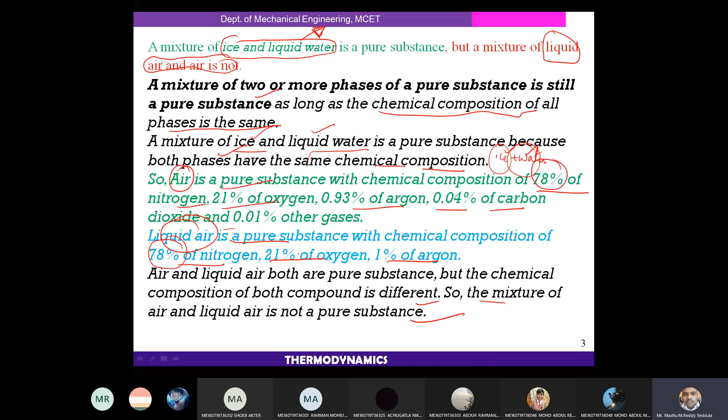The moisture content - you can see the difference between air and liquid air. In air, nitrogen is 78%. In liquid air it is also 78%. And here it is 21% oxygen, 21%. In liquid air, there is no carbon dioxide and no other gases. Carbon dioxide is not there in liquid air. In the absence of carbon dioxide, the air can be called liquid air.

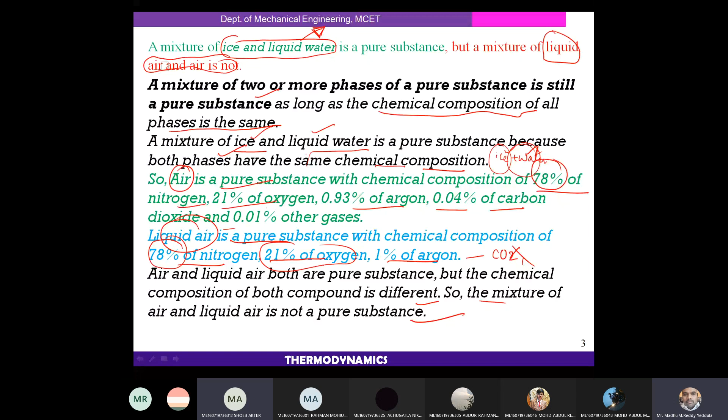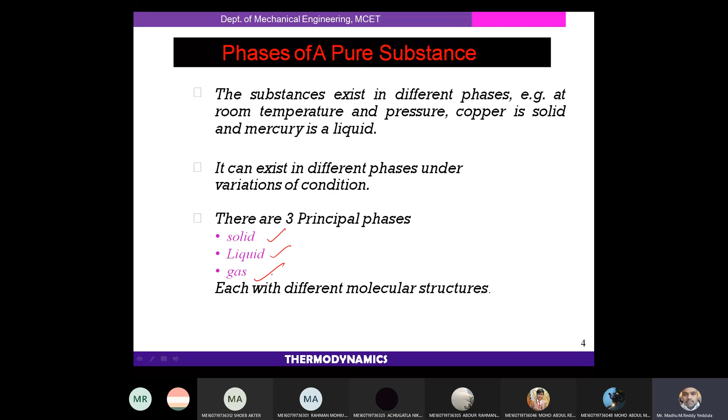Yes sir, okay, right. Now phases are already discussed. So basically any substance can exist in three different phases: solid phase, liquid phase, and gaseous phase. In solids, the molecules are tightly packed. The intermolecular force of attraction is very high, and that is the reason they are very rigid. They have definite shape, size, and volume.

Whereas coming to liquids, the intermolecular force of attraction is a little less compared to solids. That's why they have volume, but they don't have definite shape - whichever container we pour them in, that shape they will occupy. Coming to gases, the intermolecular force of attraction is very low, and they are free to move. So if you keep solid, liquid, and gas on a table, the solid remains in position and the liquid starts flowing. Naturally liquid will move from high altitude to low altitude.

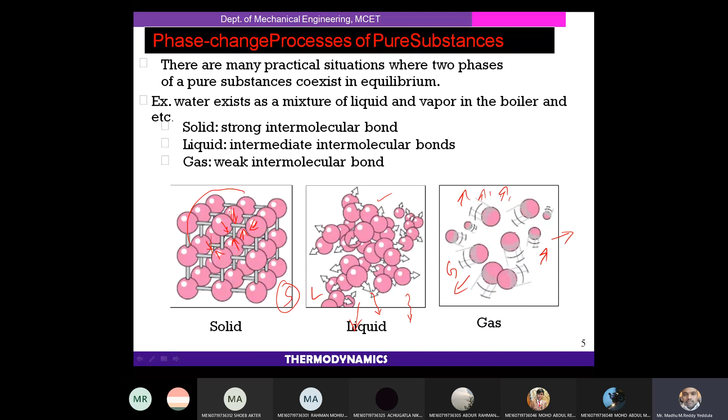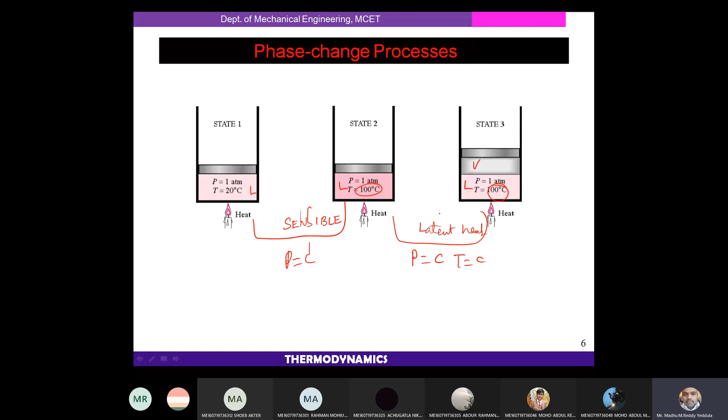So I can call it sensible heating. In sensible heating, phase remains the same but temperature is different. Whereas here, part of the liquid is converted into vapor, and the temperature remains constant. Temperature is also constant, but phase change occurs - this is called latent heat. Sensible heat means different temperature but same phase, whereas latent heat means same temperature but different phases. I already explained the difference between latent heat and sensible heat in the first unit itself.

This is a representation of the constant pressure line in the TS diagram. I already explained that the left side line is called the saturated liquid line and the right side line is called the saturated vapor line. This liquid line and vapor line intersect at a point, and this point is called the critical point. Above this point it will behave as a perfect gas, having the properties of a perfect gas.

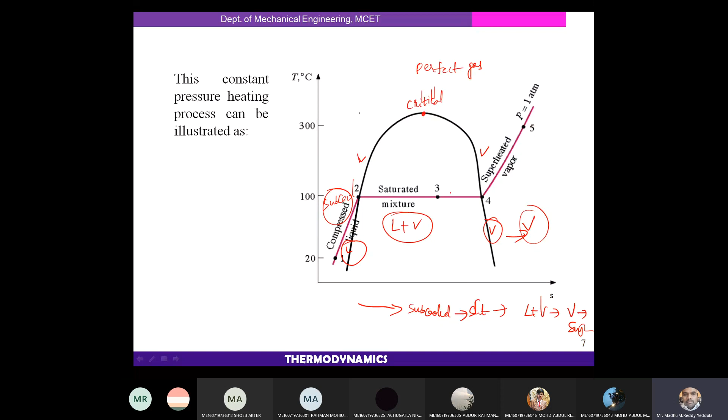If you move to the left of this, this is the subcooled zone, and this is the combination of liquid plus vapor - this line is the liquid line and this line is the vapor line. The right side of this is the superheated vapor zone. If you heat further at constant pressure, I can call it superheated vapor, saturated vapor, liquid plus vapor, saturated liquid, subcooled liquid. So moving left to right, first subcooled liquid will be there, then saturated liquid, then liquid plus vapor, then saturated vapor, then superheated vapor. This is how the phases change if you increase temperature at constant pressure.

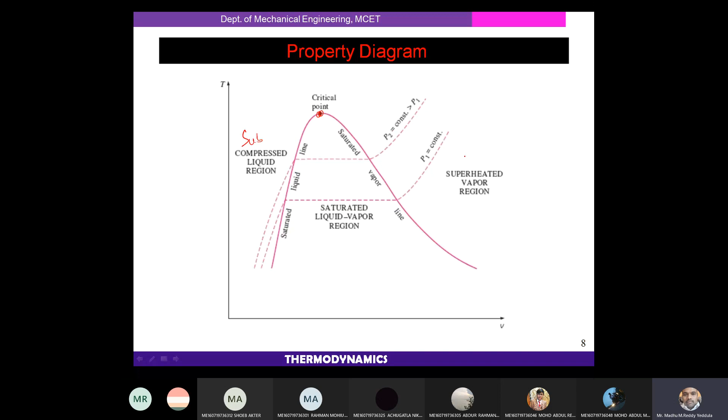Saturation is defined as the condition in which a mixture of vapor and liquid can exist together in equilibrium at a given temperature and pressure. The corresponding temperature is called saturation temperature and the corresponding pressure is called saturation pressure. Both liquid and vapor can exist together in equilibrium - that is called saturation. So the pressure corresponding to that, at which liquid and vapor phases are in equilibrium at the temperature, is called saturation pressure. Similarly, we can define saturation temperature also.

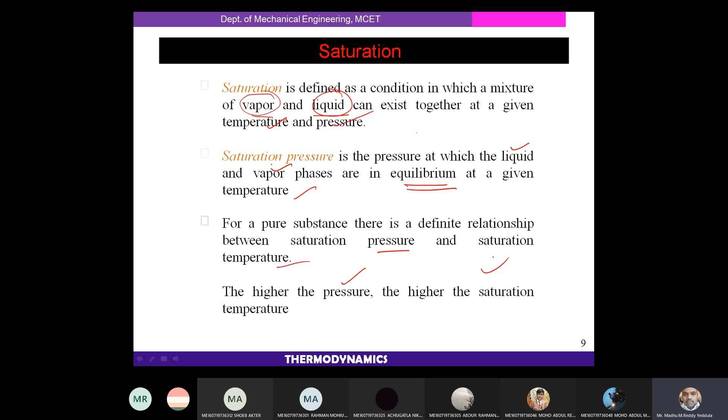For a pure substance, there is a definite relationship between saturation pressure and temperature. As I already told, if you decrease the pressure, the boiling temperature will decrease; if you increase the pressure, the boiling temperature will increase. Meaning the higher the pressure, the higher the saturation temperature. At atmospheric pressure, the saturation temperature of water is 100 degrees centigrade. If you decrease the pressure below atmospheric, the saturation temperature will also decrease proportionately.

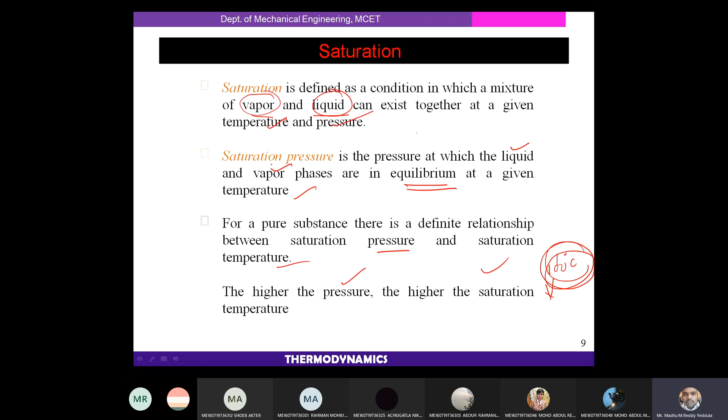Conversion is very, very important - if you have any doubt, please ask me. 1 bar is equivalent to 100 kilopascal, and this is also equivalent to 0.1 megapascal.

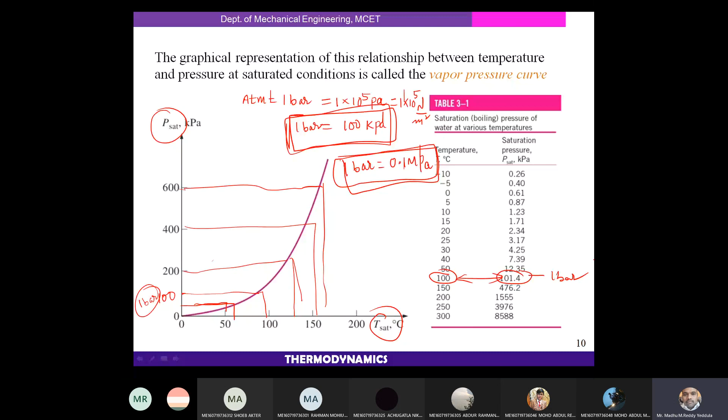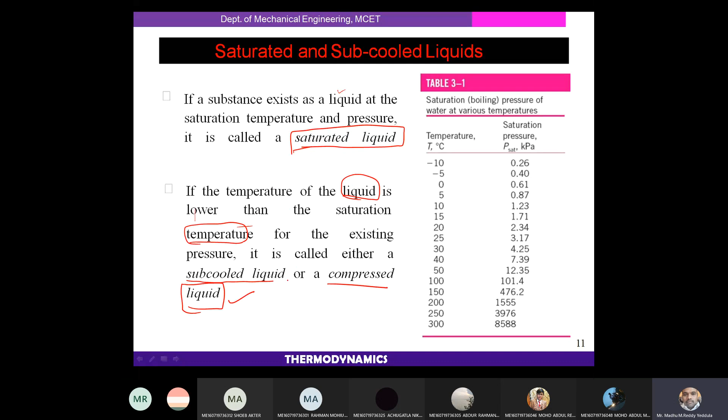Okay, if the temperature of the liquid is less than the saturation temperature, right? It will move towards the left side. If we move towards the left side, then I can call it a subcooled liquid or compressed liquid. If the temperature is less than the saturation temperature, then that fluid is called subcooled liquid or compressed liquid.

And if a substance exists entirely as vapor... if the temperature of the liquid is less than the saturation temperature, we call it a subcooled liquid or compressed liquid. And if the substance exists only in the gaseous or vapor form, I can call that a saturated vapor. Saturated vapor means it exists only in the vapor form. And if the vapor is at a temperature greater than the saturation temperature, meaning it will move towards the right of the saturated vapor line, we can call it a superheated vapor.

See, if you understand this, it is easy to remember. If you remember this curve - liquid line, if you move to the left side, if the temperature is less, it is subcooled. Vapor line, if the temperature is more, it is superheated vapor. That's it. Superheated vapor: if the vapor is at a temperature greater than the saturation temperature. So this is the saturation temperature corresponding to one particular pressure.

Okay, this is a constant pressure line. This is the saturation temperature corresponding to one particular pressure. And if you move towards the right, meaning if the temperature is greater than that, then we can call that vapor a superheated vapor. The pressure and temperature are independent properties, since the temperature may be increased while the pressure remains constant, right?

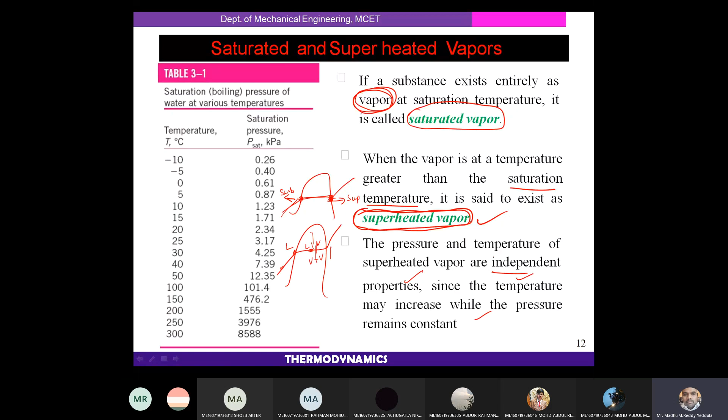So here's one more good example. This is the pressure line, right? So here pressure is constant, but if you add heat, first it comes to the liquid state, then liquid plus vapor, then vapor, and then superheated vapor, right? But throughout the process, pressure remains constant. That's why the pressure and temperature of superheated vapor are independent.

Okay, right, I already explained latent heat. Latent heat means there will be a change of phase, but temperature remains constant. The amount of energy absorbed, required, or released during the phase change of the process - let us say when the energy is released, when the energy is absorbed, right?

Now, if you want to convert water to steam, you need to supply energy, right? If you want to convert water to steam, you need to apply heat - that is nothing but adding energy. If you want to convert steam to water, meaning cooling of the steam - during the cooling of steam, I can call it condensation of steam. During that process, heat is lost by the steam, I can say heat is released by the steam. Okay, so that is latent heat.

Latent heat means the amount of energy that may be absorbed or released during the change of its phase. And latent heat of fusion - latent heat of fusion means the amount of energy absorbed during melting, the amount of energy required to melt the ice, to convert ice at 0 degrees centigrade to water at 0 degrees centigrade, because in latent heat temperature remains the same, only phase changes. Ice is solid phase, whereas water is liquid phase, right? So in order to convert ice at 0 degrees centigrade to water at 0 degrees centigrade, the amount of heat energy required is called latent heat of fusion. You got the point?

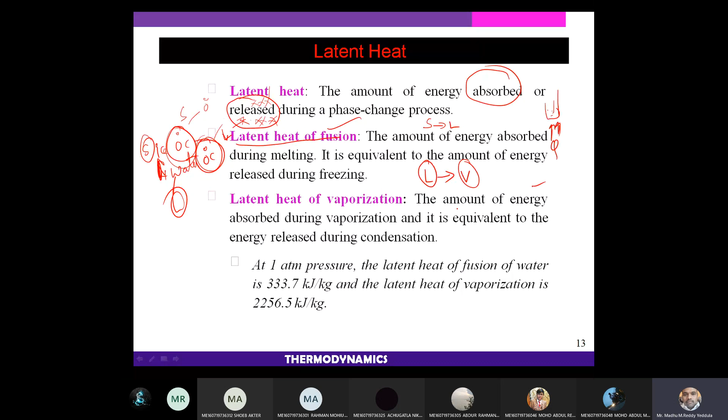The amount of energy required to convert liquid into vapor, or the amount of energy absorbed during vaporization, is also equivalent to the energy released during condensation. If you cool the steam, it loses its energy, so that energy is released. The same amount of heat absorbed during vaporization will be released during condensation. Condensation is the cooling process, whereas vaporization is the heating process. If you heat the liquid, it converts into vapor—that's vaporization. If you cool the vapor, it converts into liquid—that's condensation.

You might have studied this in school, just a revision. At 1 atmospheric pressure, the latent heat of fusion of water is 333.7 kilojoules per kg. This means if you take ice at 1 atmospheric pressure, the amount of heat required to convert ice into water equals 333.7 kilojoules per kg. If the ice mass is 1 kg, it requires 333.7 kilojoules of heat to convert into water. The latent heat of vaporization is the heat needed to convert this water into vapor—again you have to add heat. 2256 kilojoules of energy is required to convert 1 kg of water into steam; that is called vaporization. So 333.7 converts ice into water, and 2256 converts water into vapor.

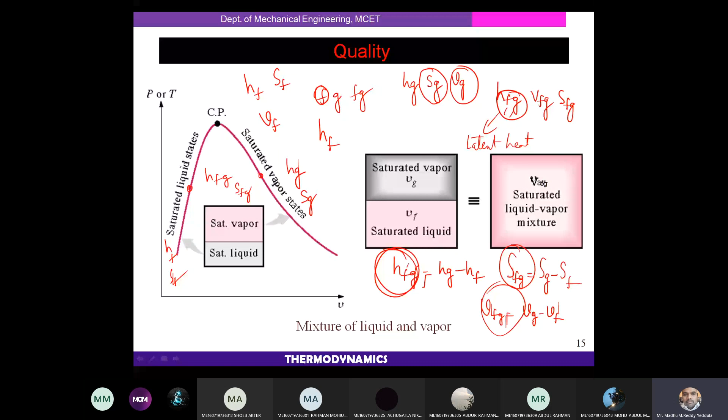The moisture content of the substance is the opposite of the quality. Quality equals mass of vapor by mass of mixture, liquid plus vapor. And 1 by quality equals liquid plus vapor by vapor. This is called moisture content, the reciprocal of quality.

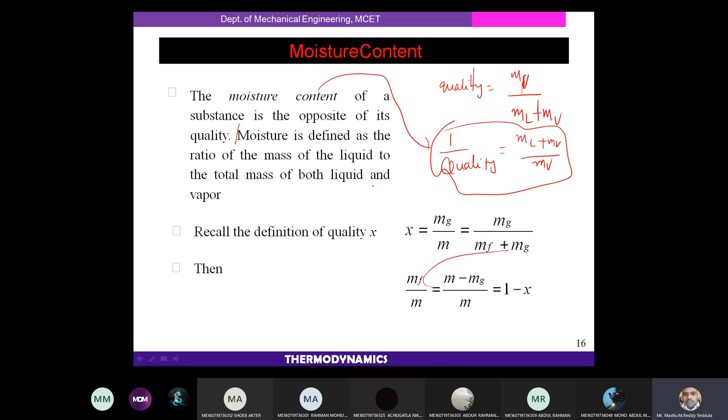For fluid, what is the quality, the dryness fraction? For fluid, what is the X value? Means on the saturated liquid line, what is the X value?

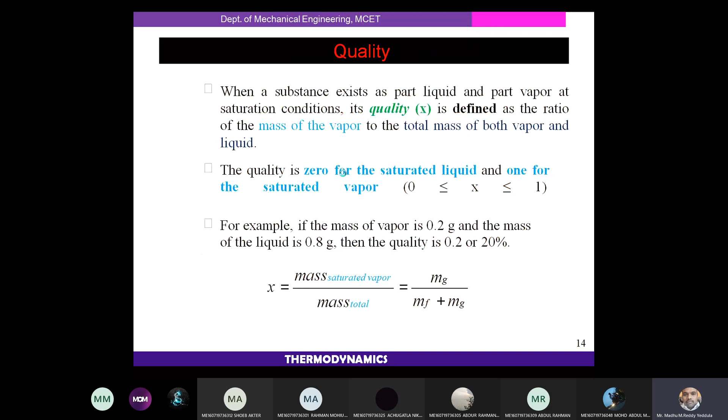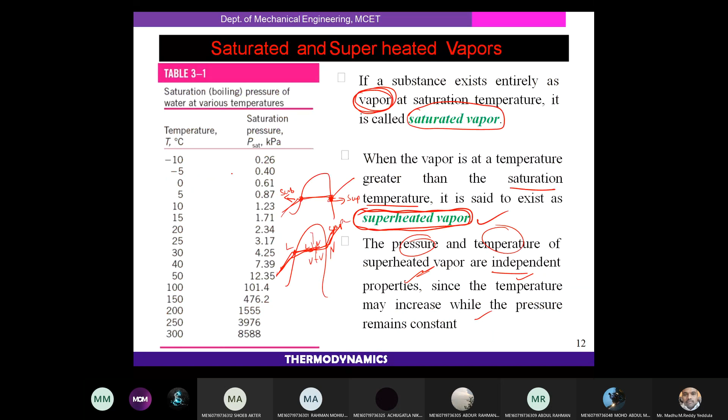Here, for liquid, dryness fraction is 0. For vapor, dryness fraction equals 1. In between, it will change, combination of liquid plus vapor.

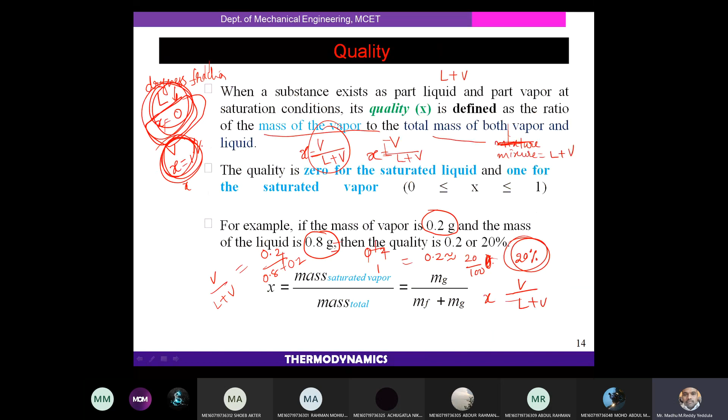X equals 0 means it is single phase, that is liquid. X equals 1 means it is also single phase, that is vapor. If x is greater than 0 and less than 1, it is a two phase mixture.

Now, specific volume we are writing in terms of quality, or dryness fraction. If you are rearranging, this is the standard equation: V equals Vf, or else let me open the page to show V equals...

Okay, we'll write on that one. Let me change the color.

So V is equals to Vf plus X into VFG. And H is equals to, for any physical quantity you can write HF plus X into HFG. Similarly, S is equals to SF plus X into SFG.

I'll explain. Suppose if I am assuming it is liquid, what is the X value? Please tell me, concentrate. Very important formula to solve the problems. If it is a liquid, what is the dryness fraction? 0. Means if it is liquid, I should get V is equals to Vf, and I should get H is equals to HF and S is equals to SF.

Means if you put 0 over here, what you will get? V equal to Vf only, you will get it. And H is equals to HF. And S is equals to SF, right?

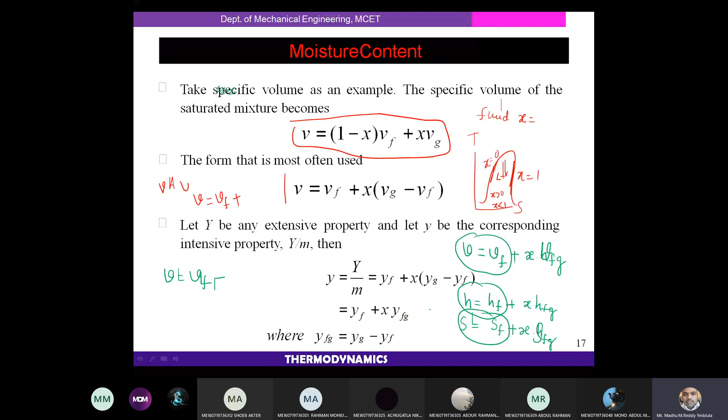Again, as I told, this VFG can be written as VG minus VF. And similarly, this HFG can be written as HG minus HF. And SFG can be written as SG minus SF.

And suppose let us assume my substance is vapor, saturated vapor. For saturated vapor, what is the dryness fraction? 1, sir. Please answer. 1, right?

Means for vapor, I should get V is equals to VG. For saturated vapor, V equal VG, right? And for vapor, dryness fraction equal to 1.

If you put X value is equals to 1, Vf plus VG minus Vf, what is left here? V is equals to VG, you are getting? Similarly, if you put X is equals to 1 over here, HF cancels, you will get H is equals to HG. And similarly, SF cancels, S is equals to SG.

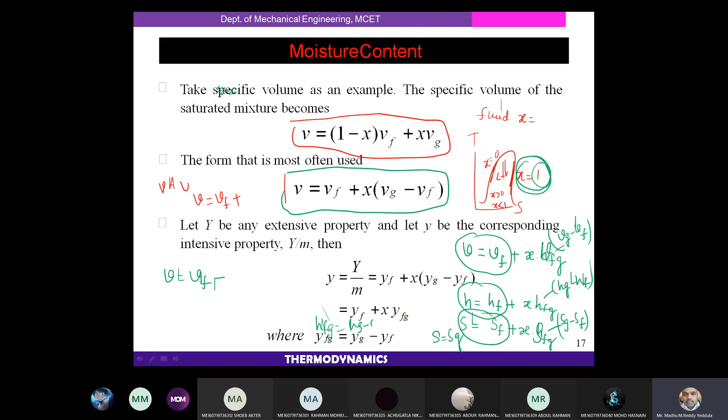Very important formula to solve the problem. We can use this formula for either entropy or enthalpy or specific volume, in terms of mixture. So that's what I explain here: HFG is equals to HG minus HF, like that. Just remember second minus first.

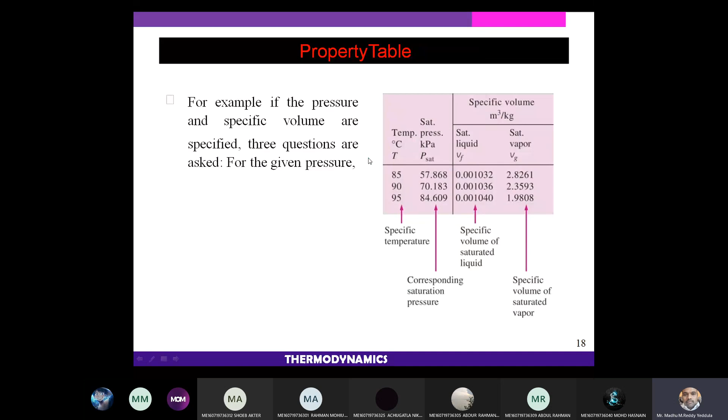And now I will show you steam tables, how to use steam table. With this we will stop today's session, and I will show you steam tables once.

How many students are there in the class? 8 members only. Do you know what is steam table? Yes, sir. Have you seen steam tables before? Yes, sir, we used it before. Where? In schooling? In diploma. Okay, diploma, right? So for regular students, please listen.

So this is a steam table book. It is a PDF copy, and so many authors are there. Standardized one is the one we will follow, that's also okay, no issue.

Use the steam table depending upon the conditions given in the problem. You should use which table. Everything will be by your definition - what is specific volume, what is internal energy.

Even you can see HFG, everything. The terminology will be there. HFG is the two-phase mixture, dryness fraction lines. So these things you can see here.

And contents, if you see, can you see the content page? So basically we have 5 tables. First and second tables are water and steam table. Only difference is first table is based on the temperature.

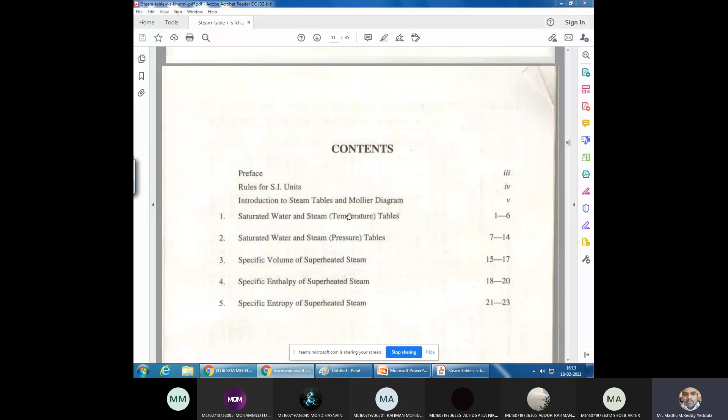No, we can't. Right, so first two tables are for water and saturated steam. Both are the same tables, but one is temperature based and the other is pressure based. The rest three tables are for superheated steam: one based on specific volume, second on specific enthalpy, and third on specific entropy. We have five tables over here. I'll show you one table now.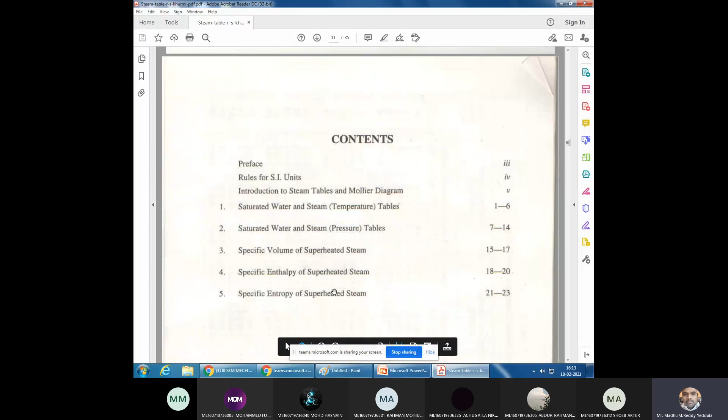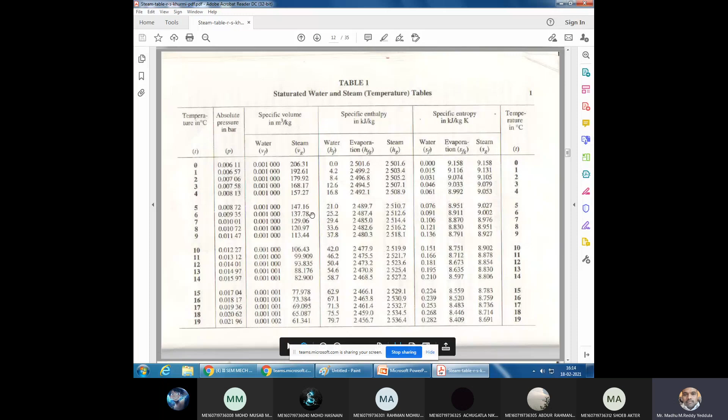You can see the saturated water and steam table based on temperature, meaning the first column will be temperature. For the temperature table or pressure table, the values remain the same. Here temperature will be there, here pressure will be there for temperature based. For pressure based, pressure will be the first column, temperature will be the second column. So this will be the temperature, and both values are the same for a particular value.

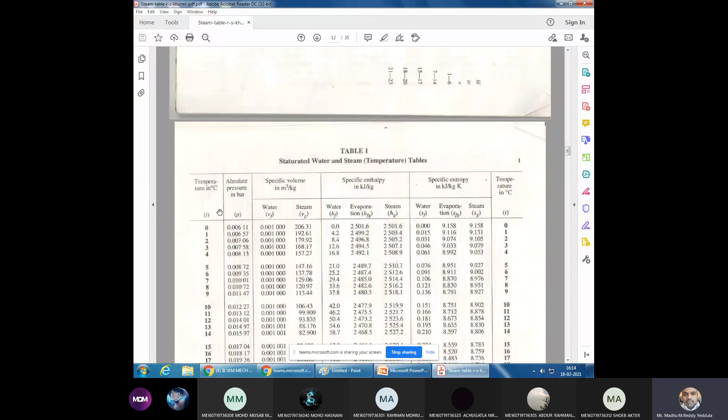Now I'll show you one thing. As we know, the saturation temperature of water is how much? 100 degrees, sir, right? Now at 100 degrees, what is the pressure? 1.013. What units are given here? Pressure units are given in bar. You can see temperature in degrees centigrade, absolute pressure is in bar. So saturation temperature is 100 degrees centigrade at what pressure? At 1 bar pressure, okay.

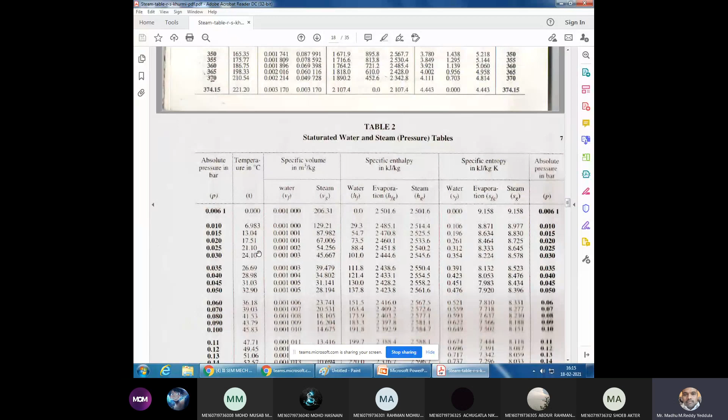Now let me check the same thing in the pressure based table. This is the pressure based table. So go for the pressure at 1 bar, the saturation temperature should be equal to 100. Yes or no? Yes, sir. Now you can see this is 1.013. What is the temperature given here? 100 degrees centigrade, yes or no? So atmospheric pressure is 1.013 exact value, but for easy calculation purposes we are taking 1 bar. There is not much difference between 1 and 1.013.

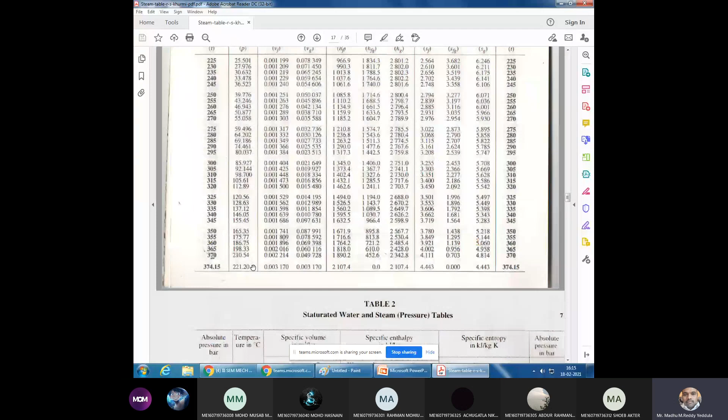Okay, now if you see one more value, VF. What is VF? Specific volume of the fluid. What is this value? 0.001044. Now we go to the temperature table, at 100 degrees centigrade. What is VF? 0.001044. Got the same value? Yes, sir.

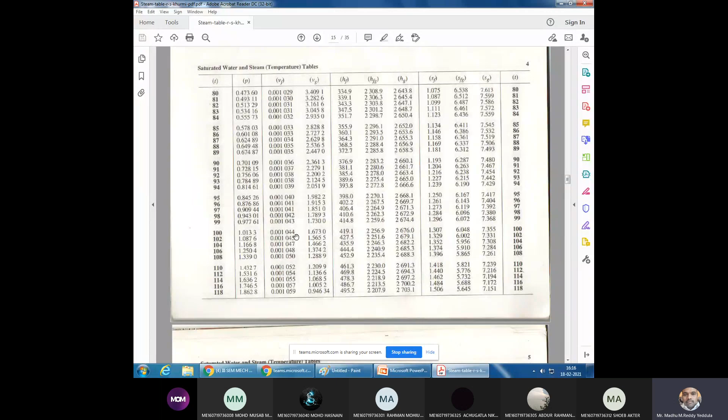Please answer my question. Meaning the saturation water and steam tables are same, provided if you know pressure you use the second table, if you know temperature you use the first table. But as we know, pressure and temperature are varying. If you decrease the pressure, the temperature will also decrease. If you increase the pressure, temperature also increases, right?

At a particular condition, let's say at 30 degrees centigrade water is given. So for water we can note down the specific volume, VF, enthalpy of water HF, and entropy of water. Got the point? If it is water, you should only take F values: entropy of fluid, enthalpy of fluid, and specific volume of the fluid.

Suppose 120 degrees is given, steam is given, steam at 120 degrees. If it is steam, which value will you take? Vg you can take, HG you can take, even HFG also you can take, and SFG you can take, SG also you can take, depending upon the conditions you have to use. If it is water, only fluid values we can take. If it is steam, we have to use gas values.

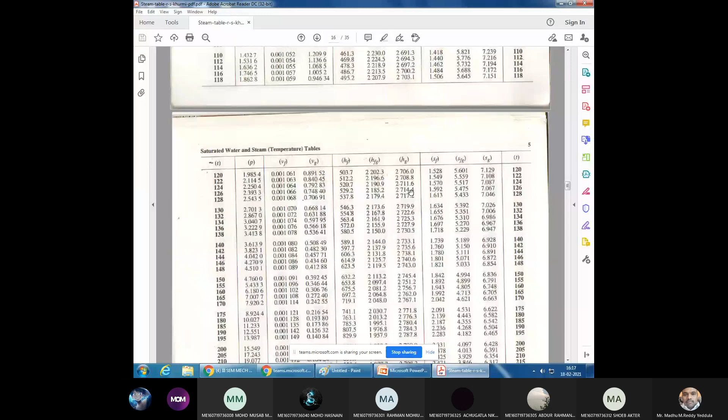Yes sir. So in the coming classes we will solve problems so that it will be more clear how to use the steam table. If you know how to use this.